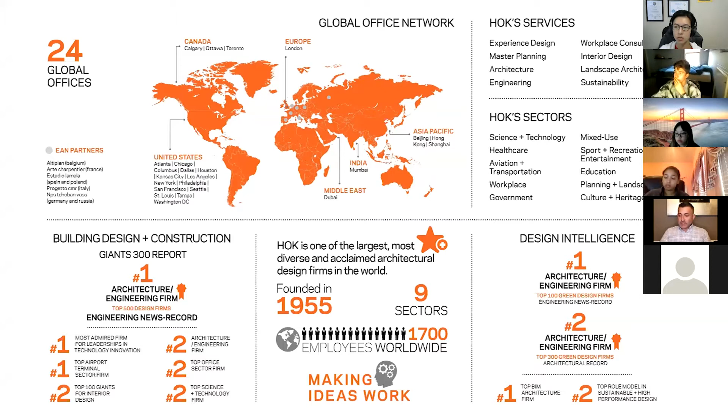Globally, the firm was started in 1955, and one of the major local projects started in St. Louis and then came to Houston. One of the big projects that brought it to Houston is the Galleria, which everybody's kind of familiar with. These are the three gentlemen that started it: Gyo Obata, George Kassabaum, and George Hellmuth. George Hellmuth's grandson, Bill Hellmuth, still runs the company, amazingly. It's really interesting to work for one of the founders' grandsons, and I speak to him regularly. He works out of our Washington, D.C. office.

What I would like to focus on is specifically what I do and how we relate engineering to the architectural world. So my career—when I walked into University of Houston the first time, I knew I would do something mathematics related, particularly engineering. I didn't know at that time it would be structural engineering. But as soon as I started to read the pamphlets and noticed the great impact structural engineers have on the world, it kind of hit me, and I found my why and my calling. So I pursued structural engineering.

I've worked for HOK since I got out of school in 2012 until now. And what you're looking at is my very first assignment. When you come out of school it's kind of daunting. You have all this teaching from the books, everything in the book is a theory, and you don't really get a grasp of how you're going to use it. You know you're going to use it, you just don't know how it'll work.

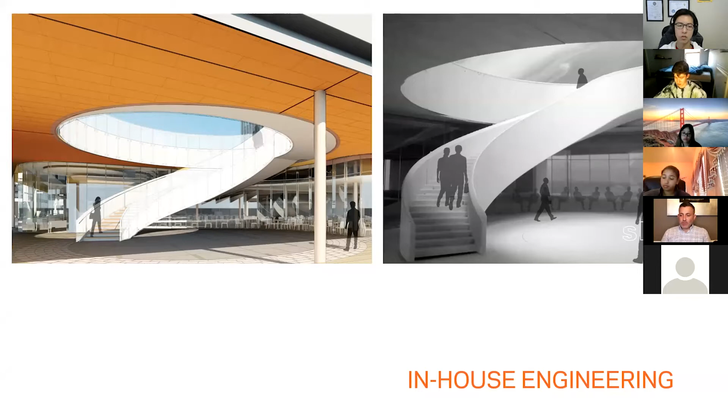I was thinking in my head, where do I start? The good part about HOK and about this field in general is you find a lot of teamwork. A lot of people will help you, a lot of people will get you from one point to another if you're willing to ask questions. So I encourage you to always ask questions—ask me questions. Just keep asking throughout your career, your schooling, everything, because that's what's going to get you there.

So they presented me with this picture, and it was my responsibility to provide the frame. If you compare architectural engineering to the human body: the way the body, the way the person looks, is the architect. The spine, the bones in the arms, the bones in the legs—the elements which keep this person upright against all forces—is my job. So what you're looking at, if you wish, is the spine, the bones of that stair.

And no matter what I did, initially I could not get the stair to work. It would just keep bouncing as I ran the simulation—it kept bouncing and I could not get it stiff enough to work. So I initially tried putting little horizontal trusses that look like this all along the entire span of the stair, and it did nothing for me. So I said, maybe I can do it vertically this way, similar to what you'd see in a bridge. I tried that, and again I noticed nothing was happening.

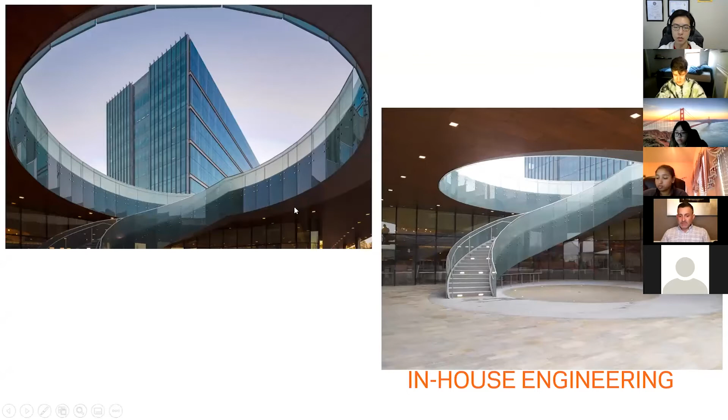So when they went to the field and erected this stair, these are real life pictures here. This is the final stair condition. When they erected the stair, they do something called shoring, which is temporary support. So you'll see temporary supports here as they're building. And they called me and said, hey, we're about to take this temporary support out and we want you to be here.

This is a very nerve-wracking moment for any structural engineer, when they say, okay, we're going to remove these things one by one. So I went to the field and stood off to the right somewhere, and my boss was with me. Usually in a steel structure, when those shores are removed, you instantly hear a loud bang. That bang is everything setting together, bolts, welds, everything locks and it starts to behave in self-support.

I thought we're going to hear this loud bang, but I was sure with my numbers, and always, as you become engineers, trust your numbers. If your numbers are right, don't instinctually think something might happen. If your numbers describe to you what's going to happen, that's exactly what's going to happen. That's another beauty about engineering.

So they removed the shores, and right when they did, I ran around a column and kind of hid. It's the first time I'd ever seen this, so I didn't know what to do, and they caught me run around and hide. The stair didn't move. There was no bang, there was nothing. It did nothing, and I was kind of waiting for it to do something. It just did nothing, it didn't move at all. And I knew that would happen in my gut, that's what the numbers said. You just kind of get scared.

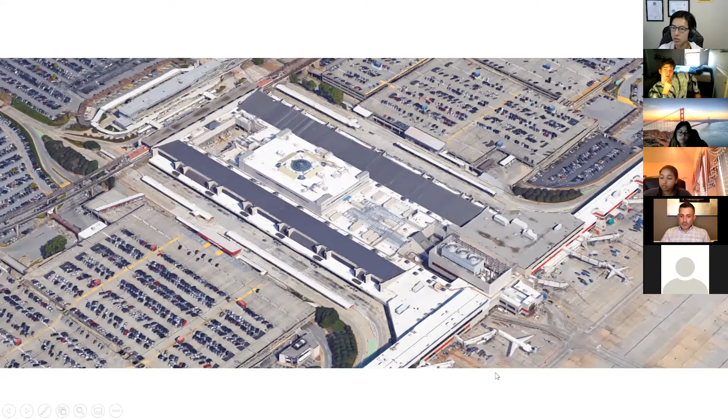So they wanted to modernize this completely. It was a $200 million project. This was the initial picture we showed. The plan was to cover those roadways with these huge steel trusses.

This was the first time they asked me to travel, and I was shocked. I was like, wait a minute, you're going to send me to Atlanta every week and I'm going to stay in a hotel and design this thing for a year and come back home? And yeah, that's exactly what was going to happen.

So for a year, I went every Monday morning at 5 a.m., flew to Atlanta, flew back Friday evening. My specific part of the design was the concrete supports that would go into the ground and support these steel trusses.

I wanted to give you an idea of how this process works fairly quickly. The architect shows us these sketches. They sit in a room and say, okay, we're going to modernize these roadways, we're going to cover them with canopies, what are your ideas? Engineers aren't really there for this process.

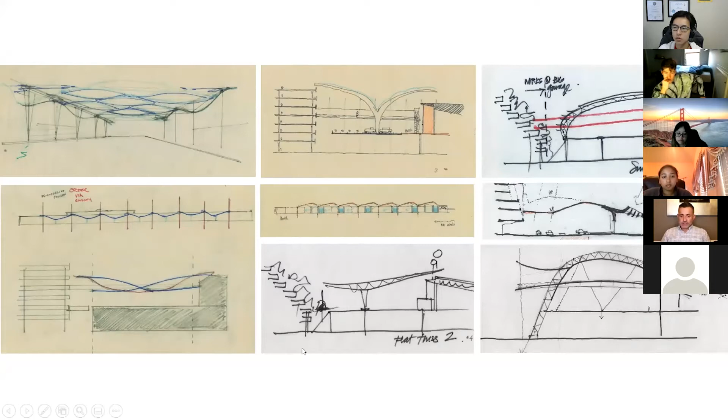Sometimes we are, sometimes we're not, a lot of times we're not. So they start to sketch their ideas, what's in their brain. These are called hand sketches, rough sketches. There's no rhyme or reason, whatever's in their head they put on paper.

From there we start to model these things. We start to say, okay, what's going to work, what doesn't? In an initial sense, strength-wise, is it going to move too much? Is it doable, is it buildable? Are we getting crazy here?

So we narrow down all those sketches into a few ideas. We begin to model those ideas, then we go back to the architects and say, look, of those sketches, these are what works. Let's start to narrow down the way we're going to go.

When they looked at this, they elected to go with the bottom left-hand corner, which are those giant trusses they call cheetah trusses, because the way they sweep, the architect referred to it as a cheetah shape, because it has motion when you look at it in section. So the cheetah truss became the direction we went.

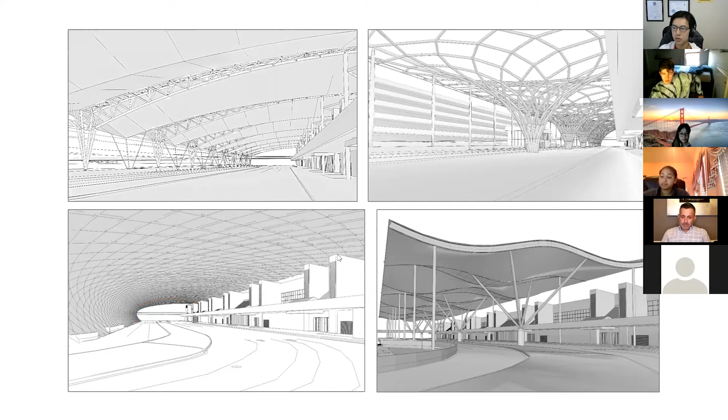So here's the cheetah truss, an overall look at it. It's covered in a material called ETFE. This is a really new, really cool material. You can embed LED lights in it. It's kind of translucent — if you can picture in your mind a thin-shelled balloon, it's that on a very large scale.

It has stiffness in plane, meaning if you pushed it together it wouldn't fold up like paper. It has stiffness in this direction, and it's fully powered. Whenever you land at Hartsfield-Jackson now, they put signs in LED. Like when the Super Bowl was there, they had the team names in LEDs on here — you could see them from the airplane. It's huge from any angle.

This thing is really imposing. And my job was this thing right here — 38 of them. These are piers which take the load of these trusses and send them down into the ground.

So again, even doing this 9 years, I look at this and I'm like, oh my God, this is going to be at the busiest airport in the world. It's going to have to be there at least 100 years. The responsibility, and the great part about the beauty of this job, this field, is once it's done, the gratification you get is amazing. All of the struggles become worth it.

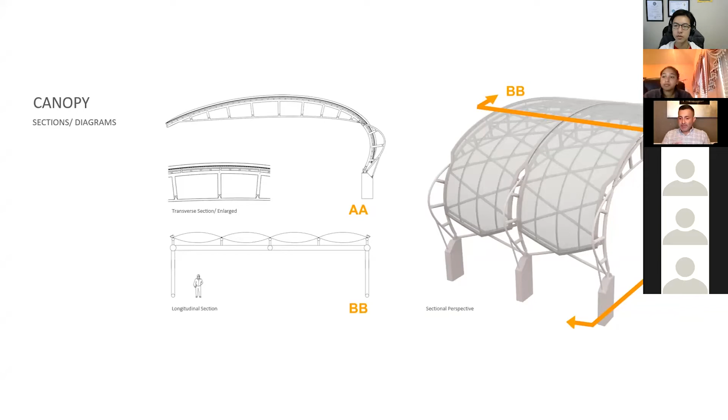When I go to Atlanta and land at that airport, all of the responsibilities, all of the headaches, everything that challenged me, that challenged the team, becomes worth it when you see these things. So I'll go into a little bit about how that looks.

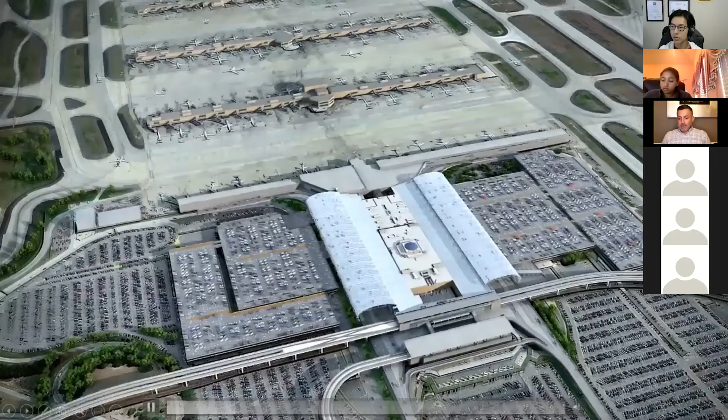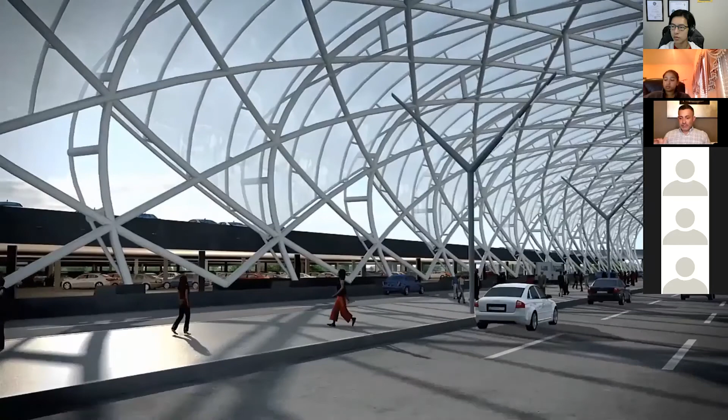Once we knew everything, how we're going to do it, we came up with how we're going to present it to the client. This is a rough graphic animation that we showed the client. This is what you'll see as you come into the roadway — you get this really imposing cover that shields you from rain, but you can see through it. That's really the crazy part. All that translucent screen has lighting in it, and the architects are free to do whatever they like with it.

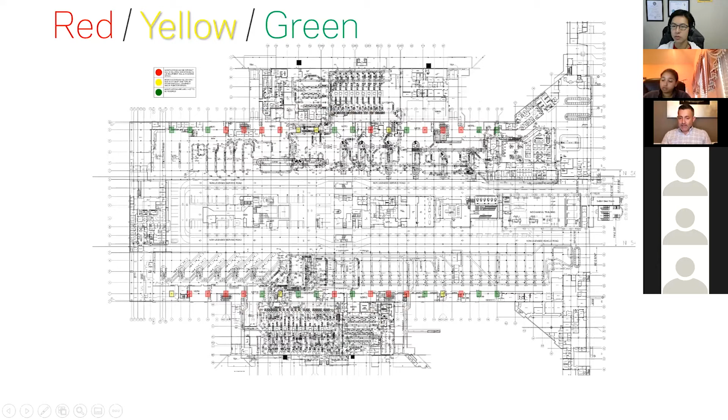So what I came up with is the use of micropiles. After this meeting, I encourage you to go look up micropiles and see why I used it.

The machine that drills micropiles only needs 8 foot of head clearance, and all of these federal spaces I knew had 10 foot of head clearance. So what I did was I designed this foundation system such that the placement of these micropiles are not set in stone. This portion varies.

So they can spread this footing as much as they like. And based on how far it's spread, the reinforcement changes, and I put all that in the drawings in a schedule. So if they're in a red zone, they find where they can place.

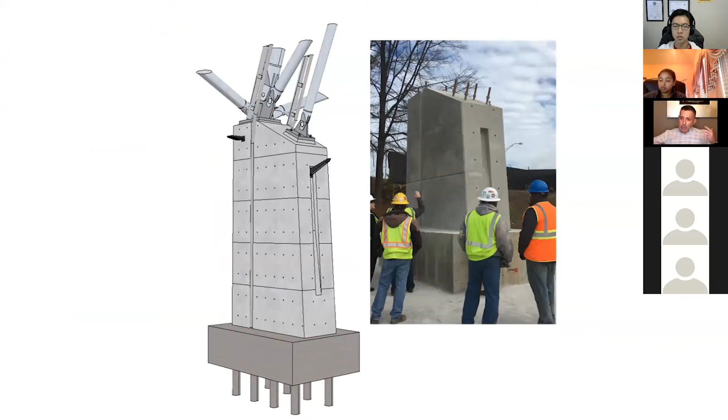And so that's how I came up with one solution that takes care of the entire complex on the airport, and the contractor was quite pleased about that. So again, this is on a much broader scale what I did with the stair, and what we do as engineers, but applied on a much larger scale with one solution that meets many challenges.

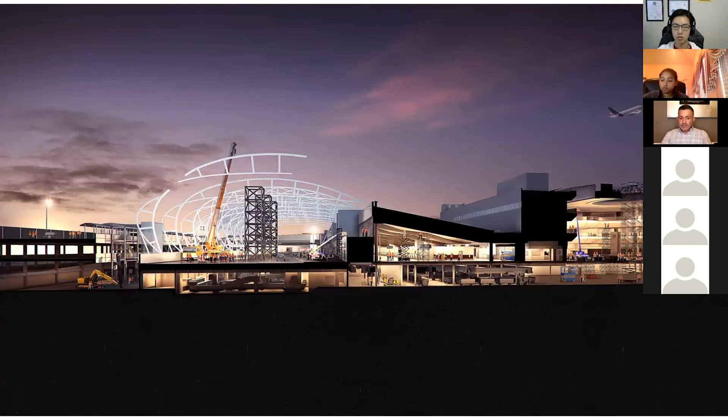So this is a graphic of the current condition, or the condition before the canopies. This is as they were building the canopies. These things were built in segments. We told them exactly in which order to place these canopies, and they came in and placed those canopies per our instructions. And this is the final condition of the canopies as they are now, just a simple graphic of that.

And you can see just quickly here, this is the pier, and people walk on this level. You have to imagine here that this is the cap I was showing you, and micropiles go down 300 to 500 feet. And this area here is where I knew the machine that drills the micropiles can fit in, so they go in there with the machine and start to drill.

And based on whatever anomaly is in the way, they spread these micropiles as they like in the field. And that turned out to be just a perfect solution for this case. And eventually, like I said, that's how they proceeded to move forward.

So in a nutshell, in 9 years, you can see that my job really hasn't changed. I've just honed those skills that my boss taught me and learned how to coordinate and collaborate with my partners, teammates, and stakeholders to come up with unique solutions as an engineer that meet many challenges and requirements. The really gratifying thing is once it's all done...

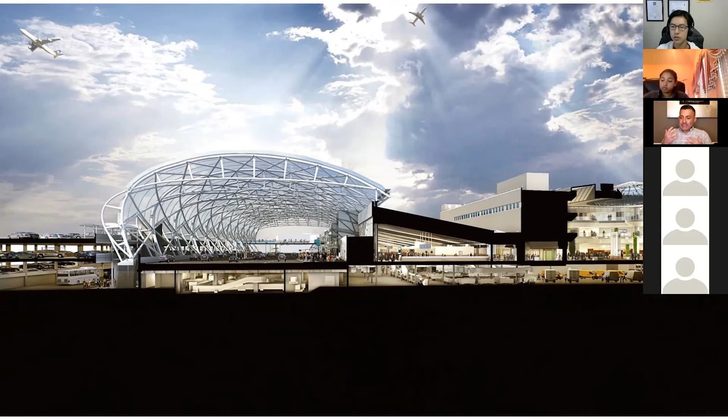I can take my parents and sit my mom on this roadway and say, look at this, I did this. It's really incredible. It's really, really a wonderful feeling.

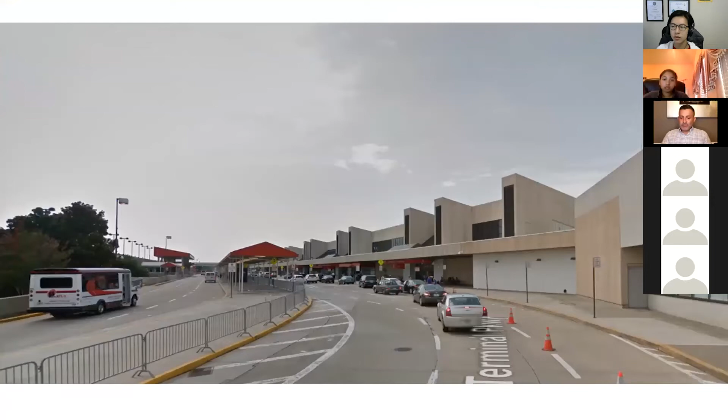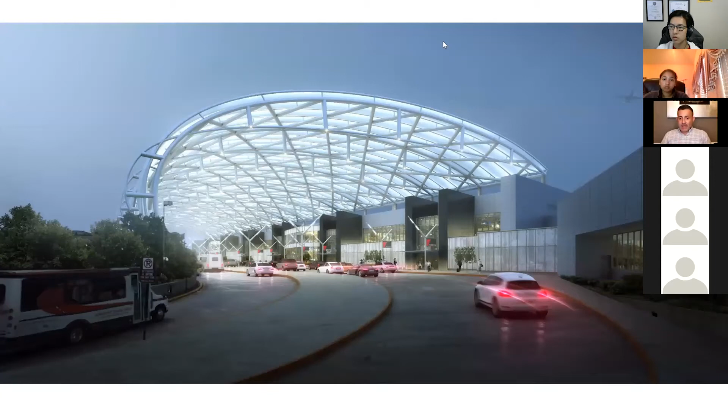This is a real picture of the roadways before. This is a graphic of what we showed these trusses would look like, and this is a graphic at night - we wanted to show them how the lighting would look. That entire translucent film has LED lights embedded in it. It's really crazy and awesome. I encourage you to Google Hartsfield-Jackson canopies after this and look at what they've done with these LED lights.

It's really mind-boggling. So in a nutshell, engineering-wise, that's what I do, and that's what I'm doing right now - meeting challenges and working on things daily. So with that, I'll open it up to questions about anything.

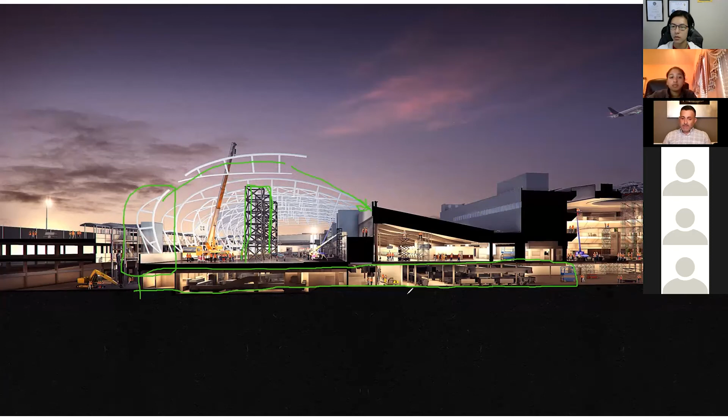So going off another one of your projects, a student asks, how many nights did you spend brainstorming ideas?

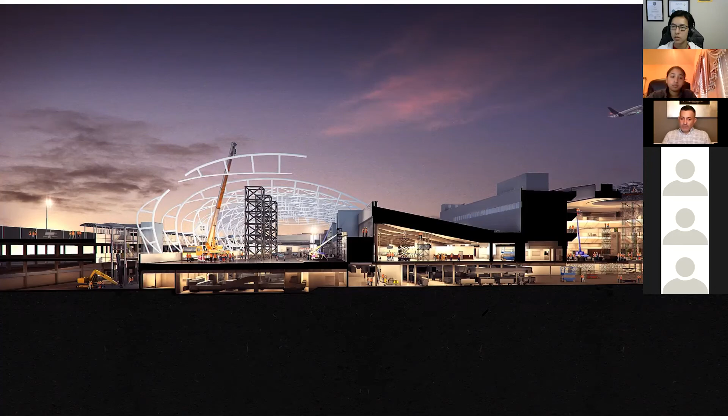Wow, that's a lot of time. Yeah. So another student asks, what part of your job do you enjoy the most?

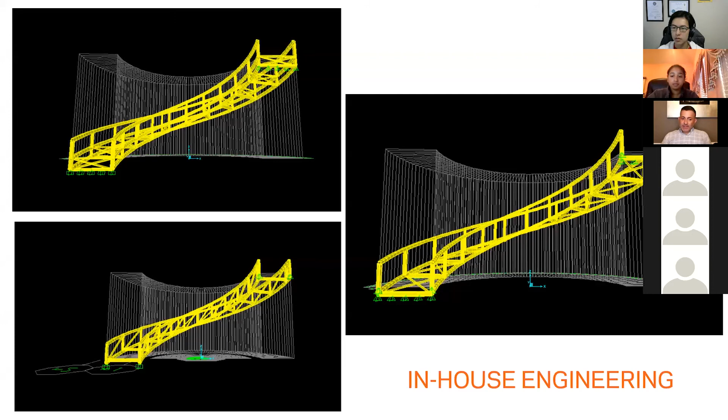The part of my job that I enjoy the most is once everything's built, once it's in this shape, in this form, I can't begin to explain the gratification you get in looking at something that you know will be there as far as you're concerned forever, and that you had a big part in making sure it's a safe thing that people will use and enjoy.

It kind of plays into this statement by our founders, which is serving humanity is at the core of what we believe. And that's really true. When you see these things and people are using them and smiling, eating on an elevated floor, all these things are happening, and it's getting into people's lives and they're enjoying what you've done. They don't know you did it, but you've served them in some way. That's the most gratifying part, for all architects, for all engineers of any field.

Another question is, if you are really good at math but not too good at physics, do you think it'll be easy to land a job in the engineering field, or in your field specifically? Absolutely. Absolutely. You don't necessarily have to be good at physics.

Being good at math is great, but a common misconception is that you have to be good at math even to become an engineer. You learn to become a good engineer once you start working. It's great to be an excellent student, it kicks you ahead of the pack a little bit. But the way you learn to become an excellent engineer is, it's great to have fundamentals in math, absolutely, fundamentals in engineering, even better. Not necessary. You learn to become a good engineer once you start to do it practically, as in a profession.